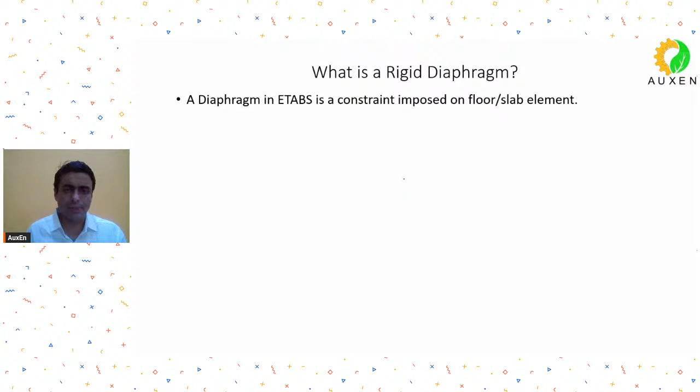We are all students of physics, so we understand what is meant by a constraint. What is the constraint in rigid diaphragm? It is that there cannot be any relative in-plane rotation and translation. The important word here is relative - the slab as a whole can rotate or translate, but point to point, relative points on the slab cannot have relative in-plane rotation or translation. If I want to apply such a constraint, that is called the rigid diaphragm.

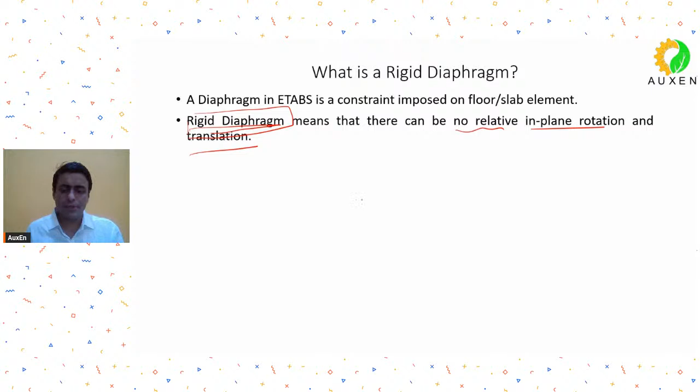Very simply put, it is just a constraint option available in ETABS. When we put this constraint, it means all the points on your floor or slab will displace as a rigid body - no relative rotation, no relative translation. Of course, they can rotate or translate as a unit in plane. Out of plane, there is no constraint - meaning the slab can bend, or points relative to each other can deform or translate out of plane.

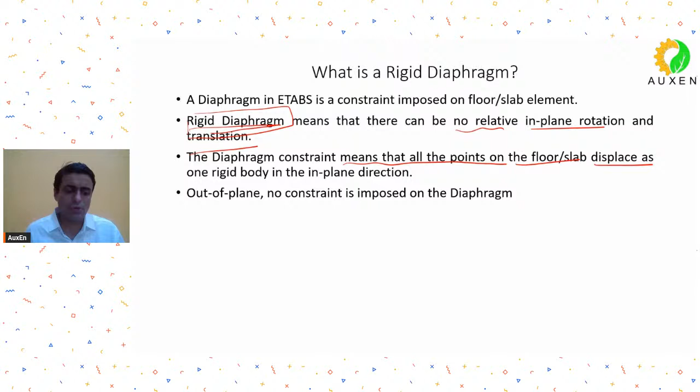So when I apply a rigid diaphragm constraint in ETABS, in-plane rotation or translation will be restricted. Point B can translate from B to B dash, point A can translate or rotate from A to A dash, but relative to each other, has AB and A dash B dash moved relative to each other? The answer is no, because originally their distance was x, and after translation the distance is still x. Globally they have moved, so translation and rotation are allowed, but relative rotations and translations are restricted. This is about the rigid diaphragm constraint.

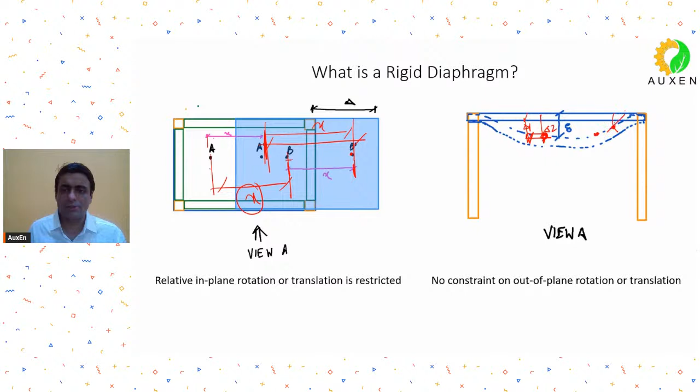What happens out of plane? Out of plane, there is no such constraint. Your points can have relative translations, as you can see over here. This point is translating more, this point is translating less. In out of plane, they can have rotations. So this point has rotated by this angle, another point has rotated by this angle. So relatively, they have rotated with respect to each other. So out of plane there is no constraint.

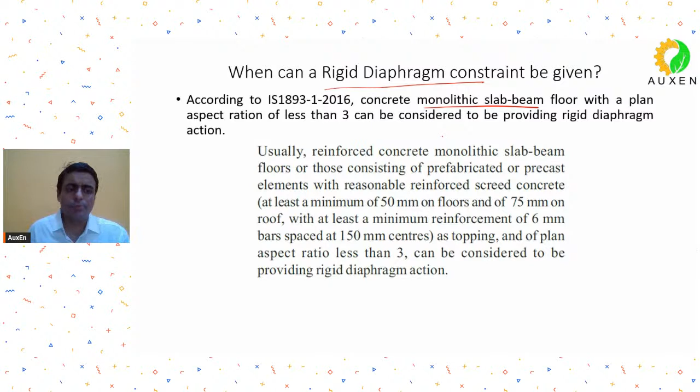Okay, this is what we mean by rigid diaphragm behavior. Now when do we assign, or for which floor elements or for which type of slabs can we give a rigid diaphragm constraint? Generally, you get a reference in IS 1893 part 1 2016, and it tells you that monolithic slab beam construction with a floor plan aspect ratio of less than 3 can be considered as a floor or slab which qualifies to be given a rigid diaphragm assignment.

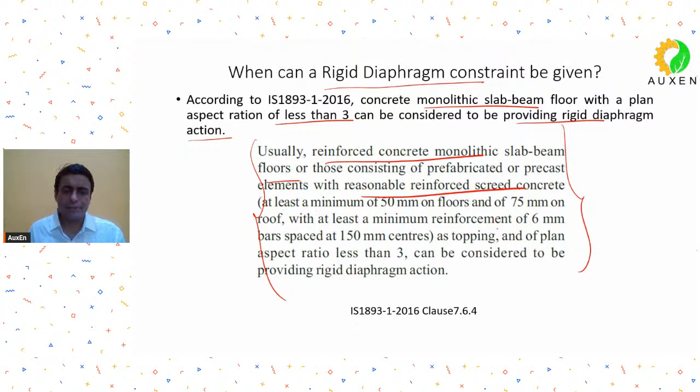Okay, and this is the codal provision that I have picked. This is 7.6.4. So if you see, reinforced concrete monolithic slab beam floors with reasonable reinforcement, at least a 6 mm bar at 150 mm center to center spacing, and plan to aspect ratio of less than 3 - if these things are met, then you can say that your slab can behave as a rigid diaphragm, and you can give a rigid diaphragm constraint to it. Okay, this is the meaning.

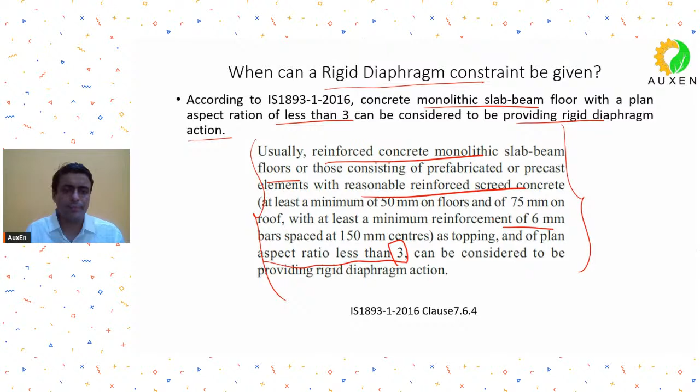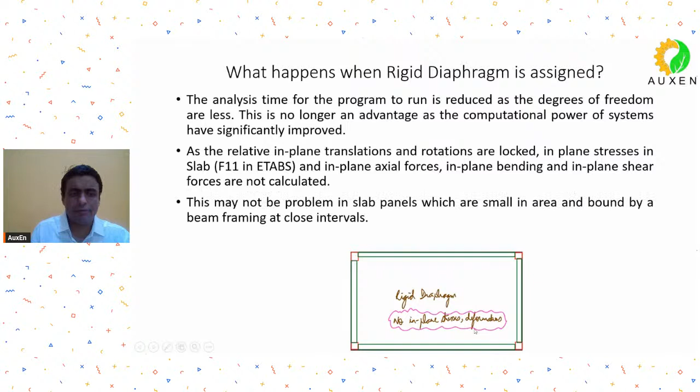We all know this. So what happens when rigid diaphragm is assigned? This is important to understand - when a rigid diaphragm action is assigned, the relative in plane translations and rotations are locked. Okay, so if the relative in plane translations and rotations are locked, now if I ask you, will there be any in plane stresses that will be generated in the analysis output? Tell me, will any in plane stresses or in plane shears or in plane axial forces be generated when I give a rigid diaphragm action? Yes or no? What do you think?

Hello. So the question is, if I apply lateral load, will this slab in the output give you any F11 stress, that is in plane stress, or will this slab in the output give any axial load output? Will it give any in-plane shear stresses? What do you think?

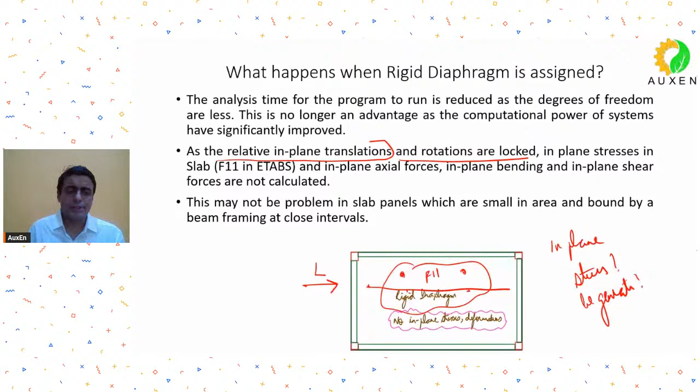So the thing to understand over here, and because of which we are conducting this topic, is that because the in-plane translations and rotations are locked, when you do your analysis, the in-plane F11 stresses or the in-plane bending moment or the in-plane shear is not calculated, and that will be given as 0 in the output. Very important to understand. So when you assign a rigid diaphragm action and do the analysis and look at the outputs, you will see all these results as 0. So they will not be considered or calculated in analysis, and therefore they will also not be taken in the design. So we are going to actually miss out on these outputs when we assign a rigid diaphragm.

Now this may not be a problem in slab panels which are small in area and bound by regularly closely spaced beam frames. When you have such a system - small slab panels bound by beams on all sides - the axial stresses in the slab, the in-plane shear stresses, in-plane bending moments are anywhere numerically not that high. So it's not a big problem in these types of systems. But the problem may arise in a different system where you are losing out on these analysis results. I'm going to show you in which systems this issue - that we are losing out on some analysis outputs - will be a problem to us.

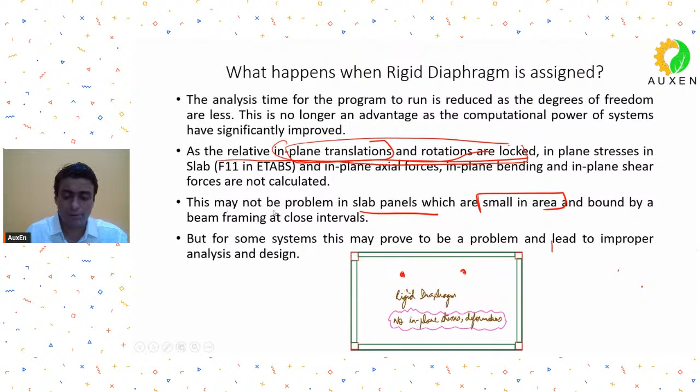Okay, so I'm going to show that to you. Systems like this - let's say closely spaced columns, closely spaced beams - here I don't have much problem even if I give a rigid diaphragm assignment, because the panel is so small that the in-plane axial stresses will be smaller in magnitude. So here I am not very worried. Where do I start to worry? I start to worry in systems like this. If you see this system, what is this type of system called as? Hello, anyone? What is this type of system called as?

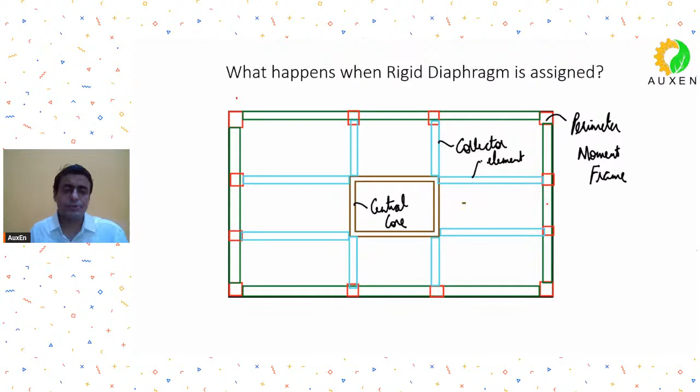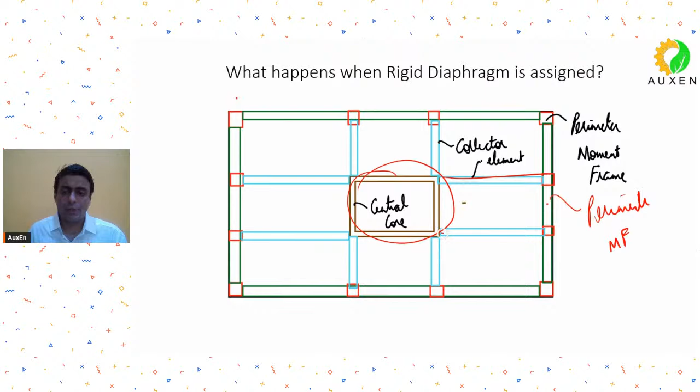So suppose in this type of system, if I assign a rigid diaphragm assignment, do you foresee any problem with that? Does anyone think it will be a problem if I assign a rigid diaphragm in this type of system? Tell me. No answer? I hope I am audible to everyone.

The problem will be that when there is a lateral load acting, between the system of the central core and the perimeter moment frame, the lateral load is usually transferred from one system to another through these collector elements. That's why they are called collector elements - they transfer the lateral loads between these two systems as axial forces.

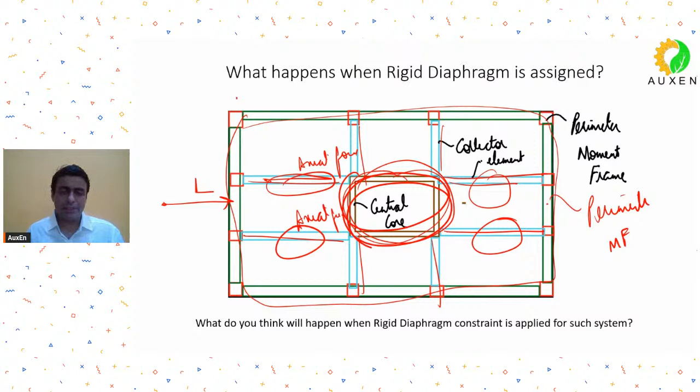So the problem is, if I have assigned a rigid diaphragm, will I get any axial force output in these collector elements? Tell me, will I get any output in these collector elements for axial forces? I will not get any axial force output.

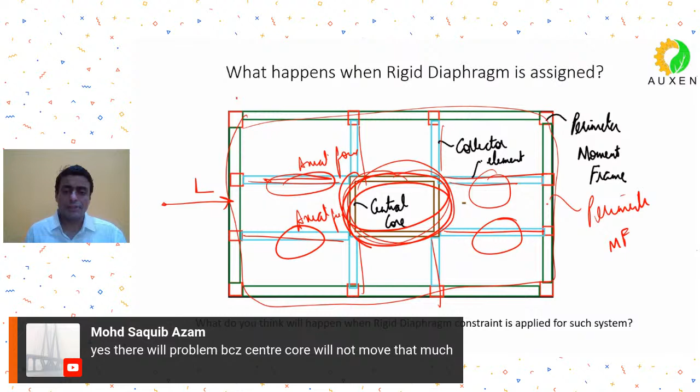One more point that Mr. Mohd Saquib Azam is saying, is that also because the deformations of these two systems will not be similar, it will again be a problem if I assign a rigid diaphragm to it. So in systems like this, assigning rigid diaphragms will be a problem because we are losing out on the analysis output, and thereby we will eventually lose out on the design results, because we are not designing our element for proper forces - the axial force will be displayed as zero.

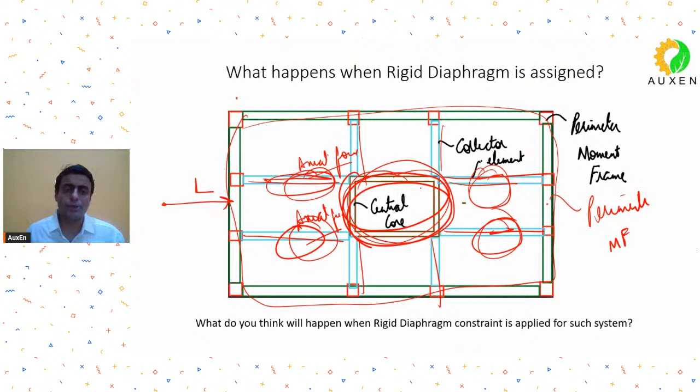I'll give you a demonstration just to show this point. So assigning rigid diaphragms in a system like this is a problem. So then what to do? In such cases, we should assign the semi-rigid diaphragm option that you have in ETABS.

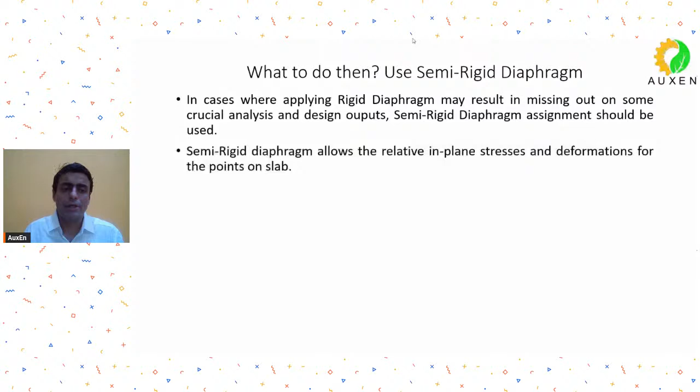A semi-rigid diaphragm is just a usual assignment where the in-plane rotation and translation is done as per the stiffness of your slab elements and other in-plane elements. That will give you a better and more accurate result. So in cases like these, it is better to assign the semi-rigid diaphragm, which allows the actual behavior to be captured, and therefore should be used in these cases.

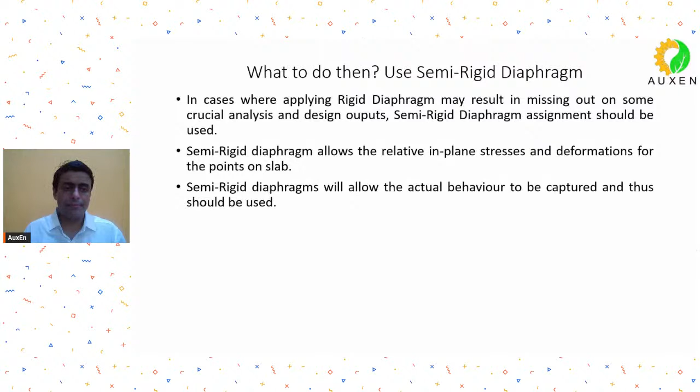Now let us understand all these things with the help of an ETABS model. I have prepared a small model, I'll just share with you. Before that, I have to stop my screen and open the ETABS window. Let's see if it works.

I don't know if you're able to see anything. What is visible right now? Nothing. I think the ETABS screen is visible now.

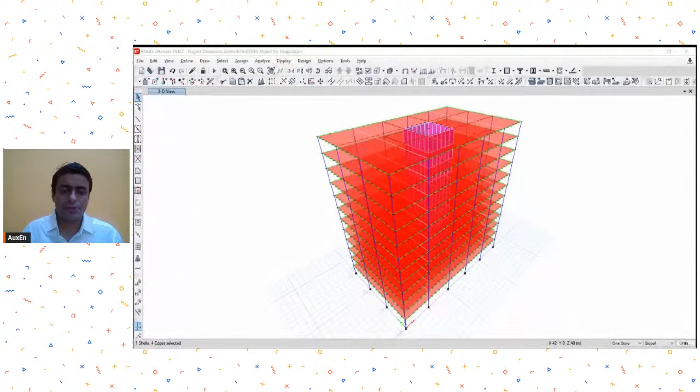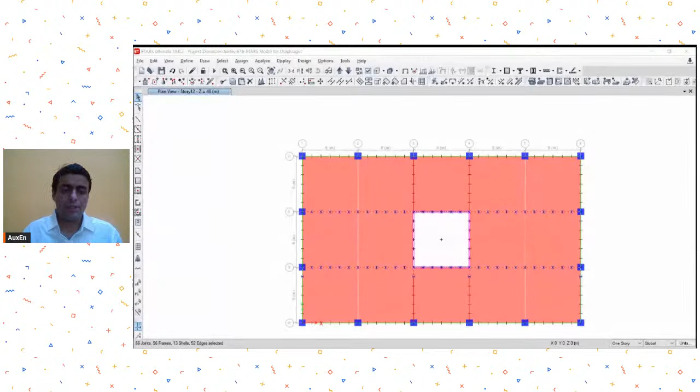I have prepared a small model like this. It's a small multi-story model. Just for presentation purposes, we have an outer periphery - these are all moment frames, and joining these moment frames are these collector elements that I have put over here. The red color elements I have put are the collector elements to join the central core with the outer peripheral moment frame system.

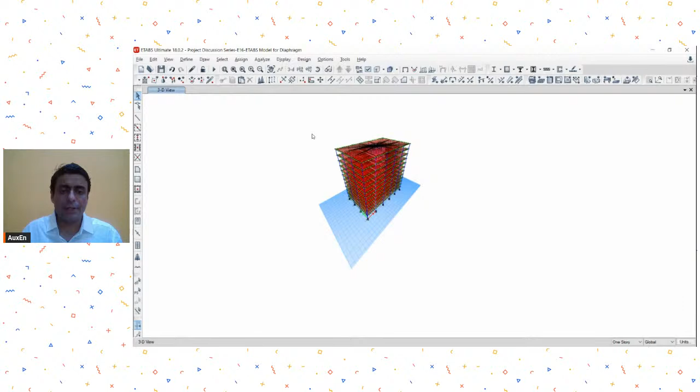Now what I will do is assign a diaphragm, and initially I will assign a rigid diaphragm to this. One more thing I will clarify here - you can simply select everything and assign a single diaphragm constraint to every floor level. I sometimes do it differently, assigning a different diaphragm name for every floor level, like D1, D2, D3, D4. But it's not required - you can assign a single diaphragm assignment to all floor levels, because a diaphragm is nothing but a constraint.

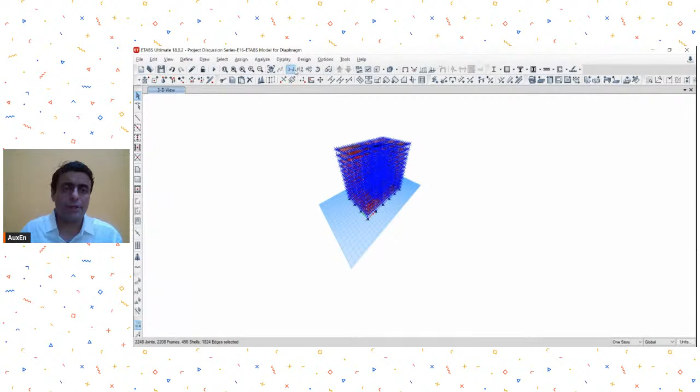So here, if you see, we have given a rigid diaphragm. Are you able to see this? We have given D1 as my rigid diaphragm assignment. So the rigid diaphragm assignment has been given as D1.

And now let me just run this analysis and we will see the output, what is happening. So the analysis is getting done.

First thing I would like to show you would be the F11 stresses in the slab. So let the output be shown on the screen, and then I will show you the F11 stresses.

So what do we expect after all this discussion? What do we expect the F11 stresses to be? Because I have given a rigid diaphragm assignment, the F11 stresses we expect would be 0. That is what we expect. Let's see if that happens or not.

I think it's taking a slightly longer time to analyze.

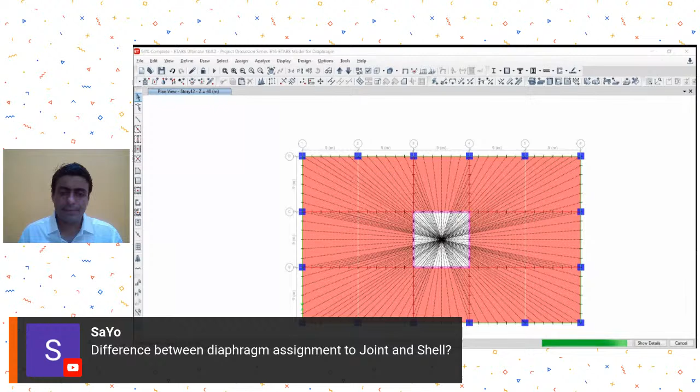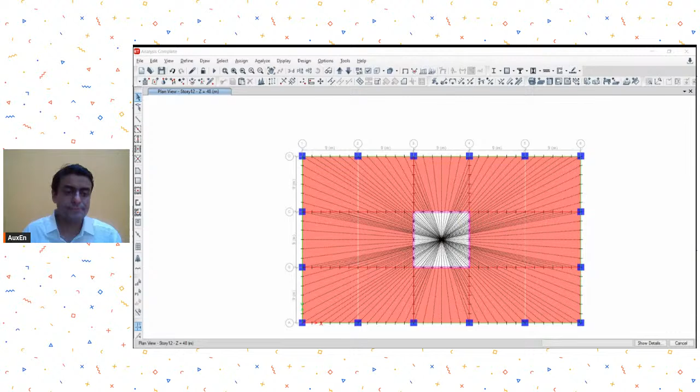So I don't know why this analysis is taking a long time, but I think it's happening now. It will be interesting to see the results that we are getting for it. I think I should have kept the model ready with analysis done.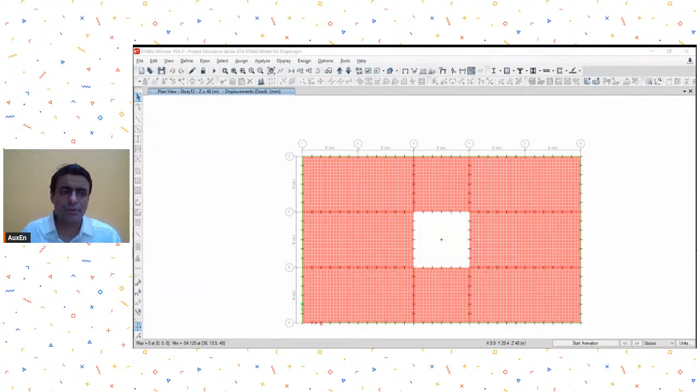Okay, so we have the output now. Let me show you the F11 stresses first for lateral loads because we are more interested in looking at it for the lateral loads. So here if you see, I don't know if you are able to see the output. Are you able to see this window?

So the F11 stresses in this entire model is 0. If I am moving my cursor over here, the F11 stresses in this entire model is 0. Why so? Because we have given a rigid diaphragm assignment, so it will not give any F11 output. That degree of freedom is locked. So the output we are getting is 0.

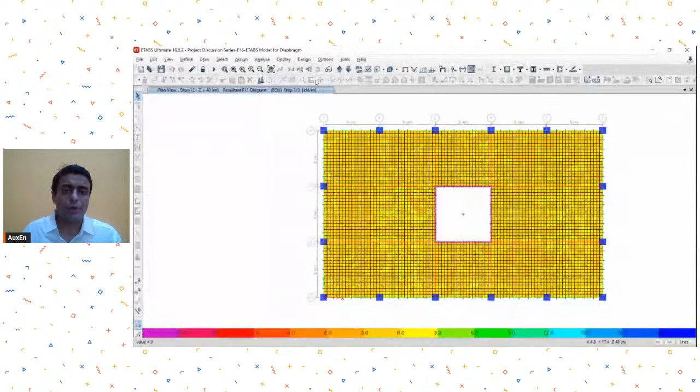F11 value 0. Now if I go to the beam framing member forces and show you the axial forces, again you will notice that the axial force is 0 in the collector elements.

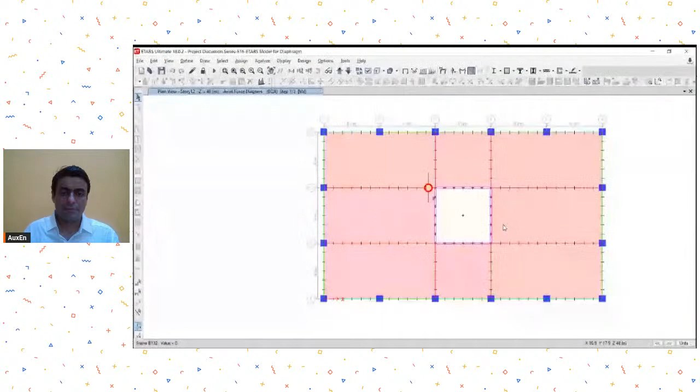Let me just do one thing. I think the outputs are not visible on the screen, are they? Let me share my screen. I think the window is not visible. The member force window, is it visible when watching it live?

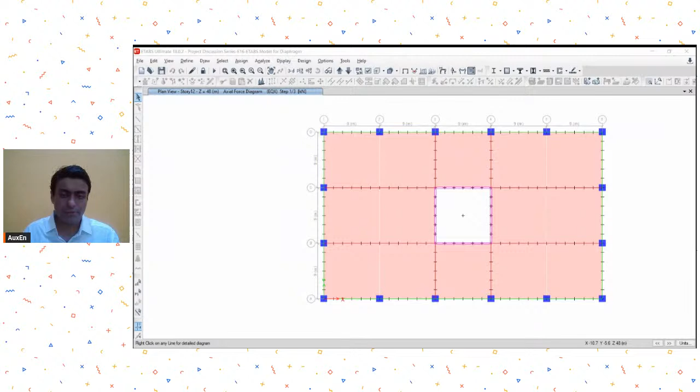I'm not sure. Okay, so the axial forces in this member is 0 right now. Wait a minute, what I will do is I think I'll share my entire screen. That way you will be able to see it. Yes, so here you will see the axial force to be 0 in the collector element.

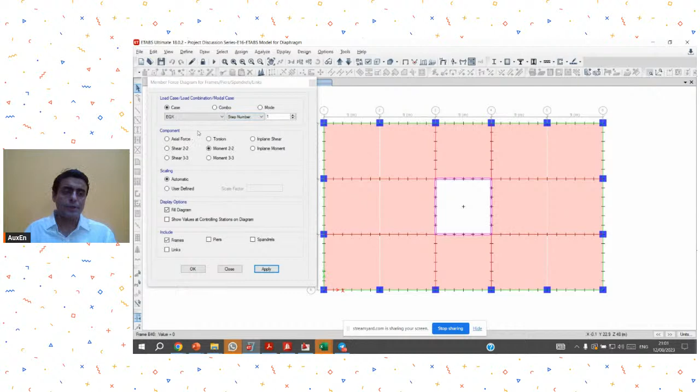No axial force. If I click on the M22, again you will see no M22 moment. All right, so everything is 0 over here. Why so? Because I have set a rigid diaphragm assignment.

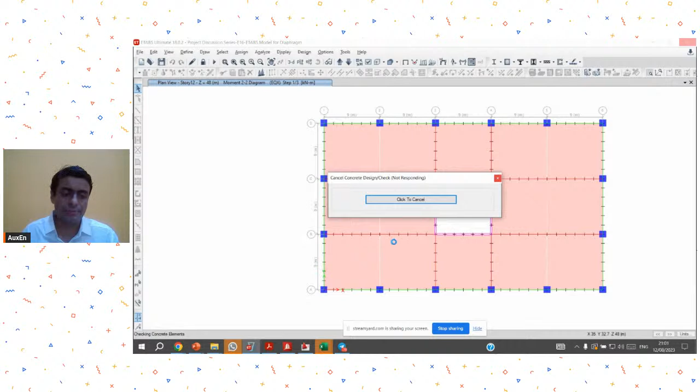Now the interesting part is that if I had to design this, so I click on design. Because there is no axial force in the collector element, the member will not be designed for any axial force. So in the design as well, we are going to miss out on the axial force in the collector element. Let's see.

So let me just right click on this, and for a lateral load combination, I'm just showing you the results. You will see that the design PU is 0. There is no axial force in this collector element because the rigid diaphragm assignment was given.

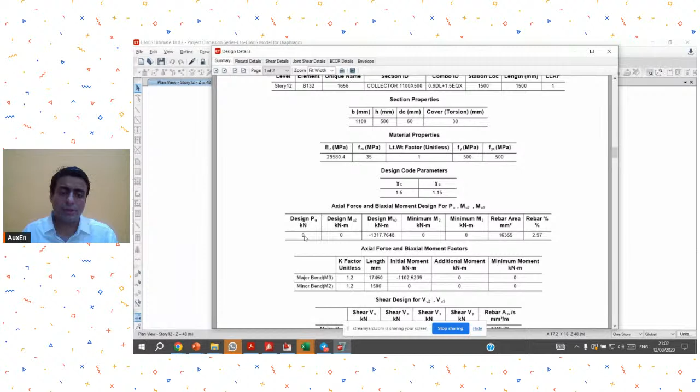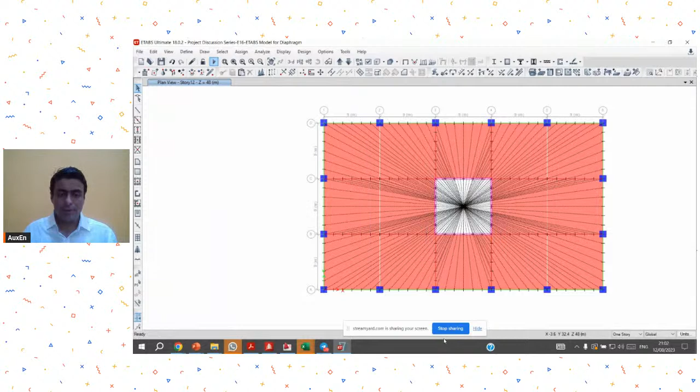Now what I will do is I will unlock the model and change the definition to semi-rigid diaphragm. When I change it to semi-rigid diaphragm, I expect that we will get the in-plane shear stresses F11, and I will also get the axial forces in the collector element. Those will be properly analyzed and accordingly taken in the design. That is what our expectation is. Let's see what happens.

Yeah, so the analysis is happening.

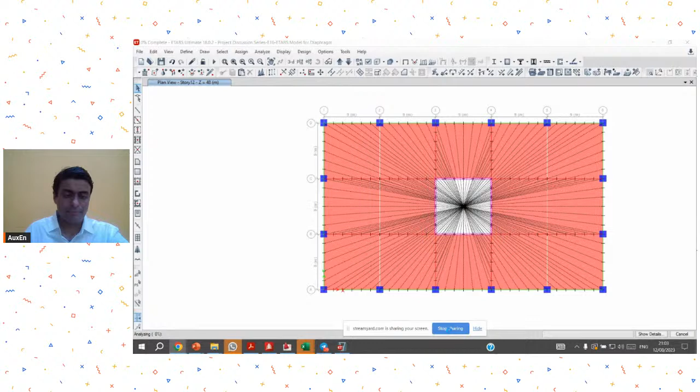Let it happen. Let the analysis happen, then we will see. Okay. I think running e-tabs in a live session may not be a very good idea because it is slowing things down a bit. Anyway,

So the analysis is happening and then I will show you the outputs. This time we will see some interesting outputs because after giving the rigid, semi-rigid diaphragm assignment, now we will start getting the F11 stresses and we will also start getting the in-plane axial forces in the collectors.

In the meantime, have you done this type of working before? Have you given semi-rigid diaphragm assignments and seen the F11 stresses or tried to see all these outputs? Hello? Yes, anyone who has tried to see these outputs before? Okay, so I think no one has tried to see this type of an output before. So maybe it's the first time for us that we are trying to look into this issue.

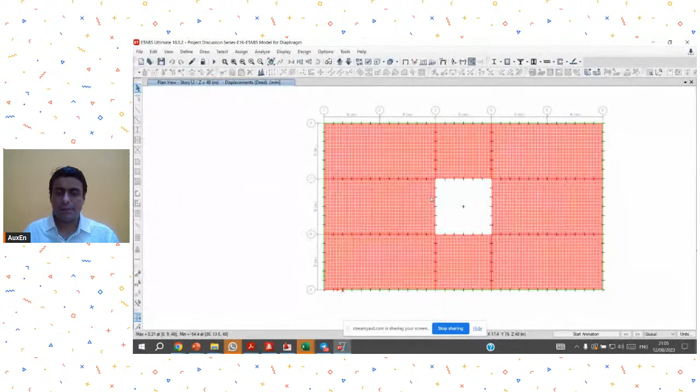Yeah, so analysis has happened. What I will do is I will once again share my screen, my entire screen I will share. I think the ETABS is visible. So now I will show you first the F11 stresses. And now interestingly, earlier what we were missing out in our F11 stresses, now we get those results.

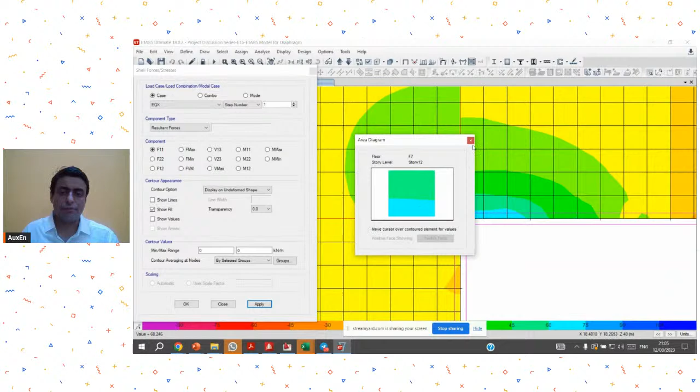I think you can see this cursor, it is almost 60 kilonewton meter per meter unit, 60 kilonewton per meter width. This is the F11 stress I'm getting over here. Similarly, I'm getting an F11 stress of almost close to 69, 70 per meter width over here. So all these F11 stresses otherwise I would have missed, especially at this junction points if I had given a rigid diaphragm, and now because I have given a semi-rigid diaphragm, I start getting these outputs.

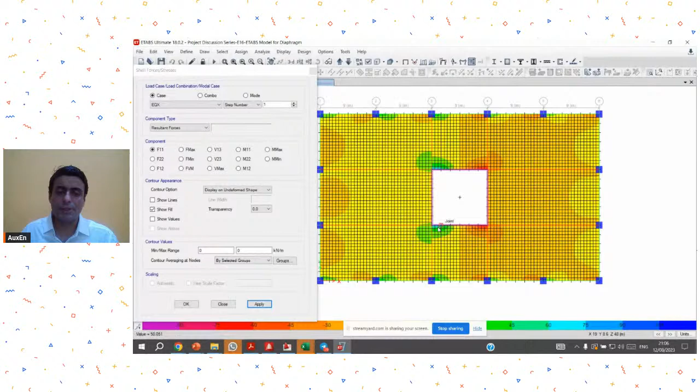Okay, more interestingly, if I go to see the axial forces in the collector elements due to lateral loads, this time you will see substantial axial forces being generated, yes or no? You will see substantial axial forces being generated in your member. This you were missing out earlier when you had given a rigid diaphragm assignment.

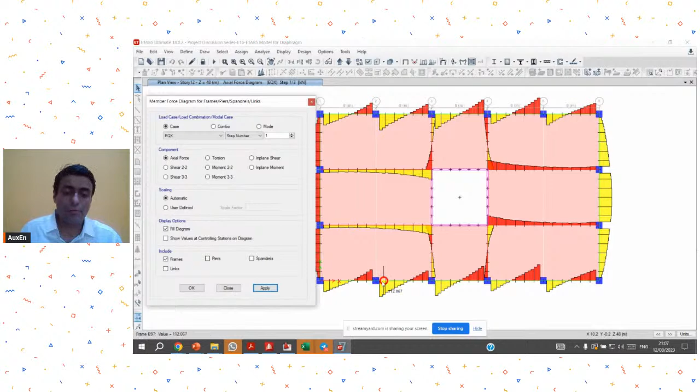Similarly, over here also you will see close to 80 kilonewtons of axial force which you would have missed earlier. Now, 80 kilonewton may be a substantial axial force in some cases. If your cross section is large, it may still not be very substantial. But if your building system, especially if you are doing a tall structure, it may be a substantial axial force to miss out on.

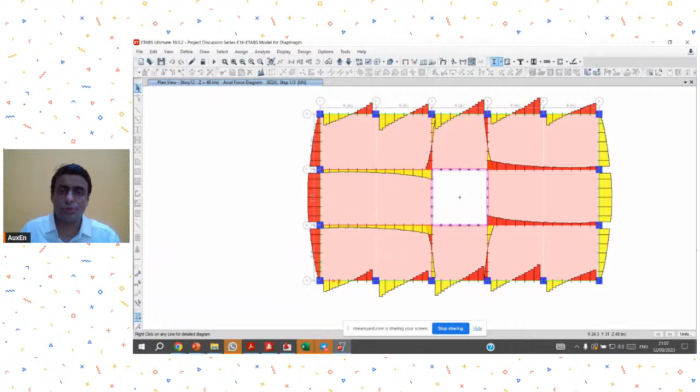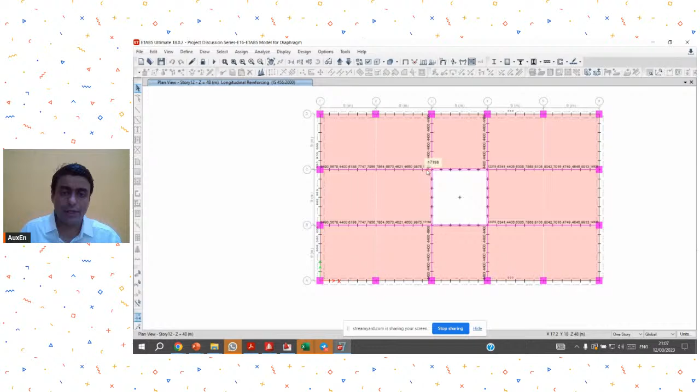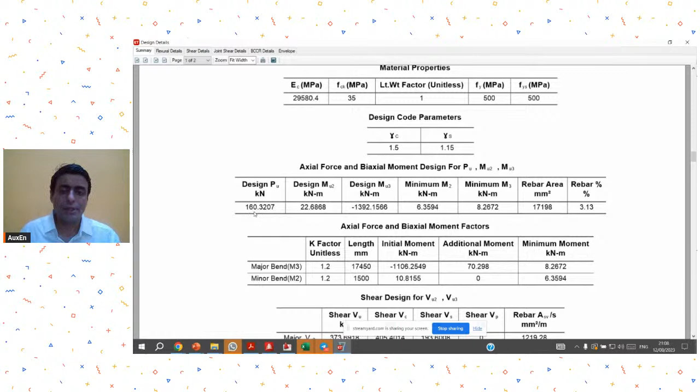Now, if I give a concrete design option to this, so you will now see that the axial force in the collector will now be considered in the design as well. So if I right click over here and if I show you this member, this time you will see that the PU is 160 kilonewton that we were missing out on earlier, and we also start getting some MU2. So this PU and MU2 we were missing in the design earlier, but now because we have given a semi-rigid assignment, it is being considered because ETABS is calculating these in-plane axial forces and moment.

So this is how the behavior is different when you give the rigid and when you give the semi-rigid assignment. Okay, so in cases where you have got large spans, in cases where you have such systems, when you have to design your collector elements, or where you have to check your slab for proper lateral load resistance, then you should give the semi-rigid assignment and then proceed. Okay, so I think this is what I had to tell you about this aspect about the semi-rigid and rigid diaphragms. I hope this is clear, our discussion.

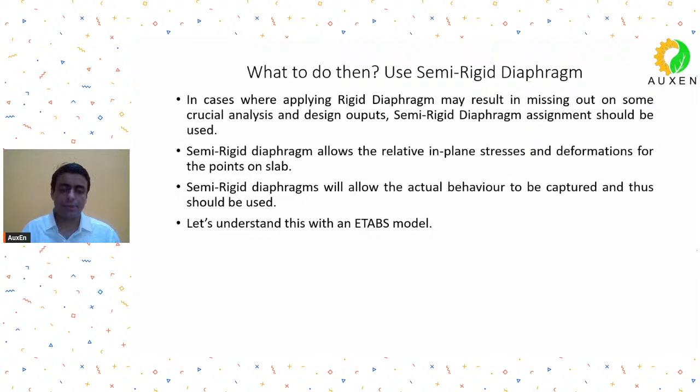Yeah, it went a little bit slow because of that issue with the live demonstration in ETABS, but I think you understood. So what you can do is you can try it out yourself also by giving this rigid diaphragm assignment and semi-rigid diaphragm assignment and then looking at the outputs. So this is what I had to tell you about this semi-rigid and rigid diaphragms. Now I go to the next point in discussion. If you have any questions, you may ask, or we can take your questions later on as well. Okay.

So now let me go to our next discussion point, and this is rather not a technical discussion per se, but nonetheless an important discussion. Okay. So as a civil engineer, we always want to build, we always want to create infrastructure. But the question over here that we would like to ask ourselves is that, are we destroying the nature? Are we destroying our ecosystem? And therefore, are we destroying ourselves by building too much infrastructure with very little planning? So that is what I would like to just discuss. This is a thought that I had over the past two three months. So I just thought I will put it over here on this platform for discussion.

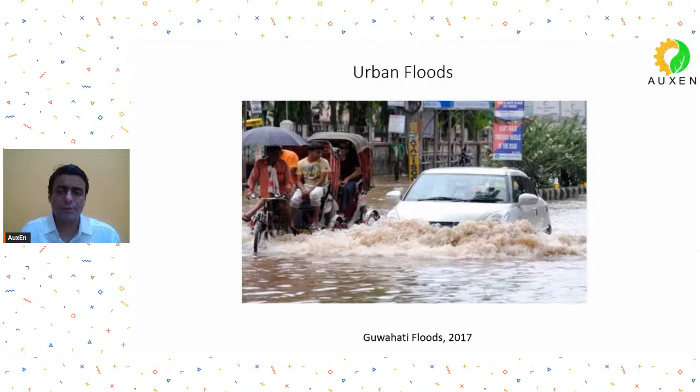But here we want to discuss why urban flooding, the phenomena of urban flooding, has increased. Urban flooding, when I say, I am mainly talking about cities getting flooded in a very short time - sudden flash flood like situations in cities, and not necessarily in a very high rainfall event. So what is the reason for this urban flooding phenomena seen in Indian cities?

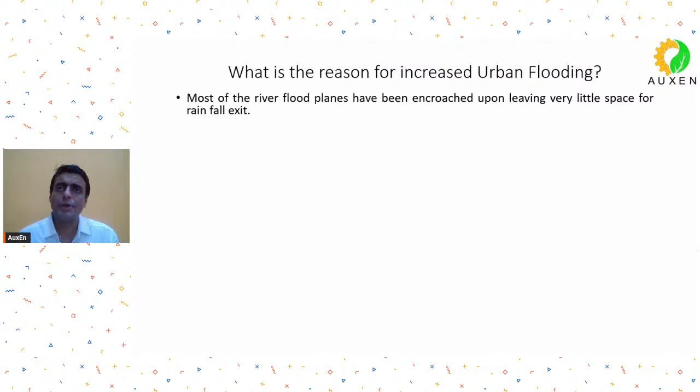As Megha is saying, rigid pavement, no water percolation. So I've tried to list down some points. These days, in all the cities, most of the river floodplains have been encroached upon. There is very little space for the rainfall water to exit from the urban space. Most of your river floodplains are encroached. Any big city you go, the natural drainage basin that you have will be encroached upon. If a city has a lot of water bodies like lakes, they will be choked up or filled up, and infrastructure projects will come up on them, leaving very little scope for water collection and drainage.

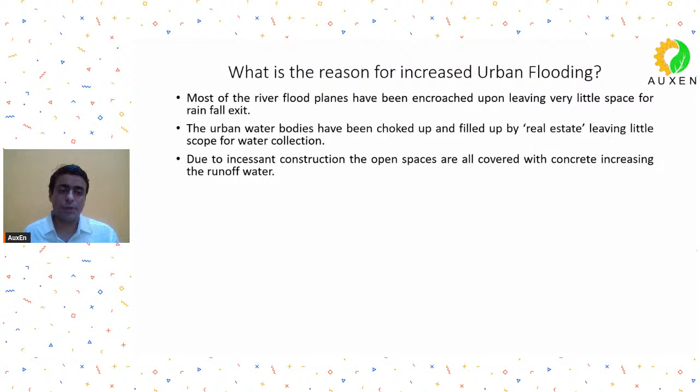Due to large scale incessant construction, the open spaces are all covered with concrete, what Megha was saying. Because of that, the runoff water increases - the ability of water to percolate is drastically curtailed because everything is getting covered with concrete. So that is another issue.

Another issue is that in most cities, the stormwater drainage was designed 20, 30 years ago for a lower stormwater volume. In new construction projects, you rarely get to see any provision for stormwater drainage. New roads coming up, new townships coming up - there is hardly any system made for proper stormwater drainage evacuation. So improper drainage planning, as Mr. Akbar Hamid is saying, is also an important and major cause.

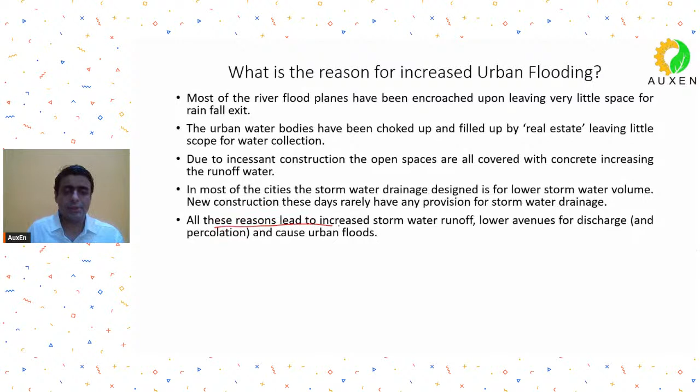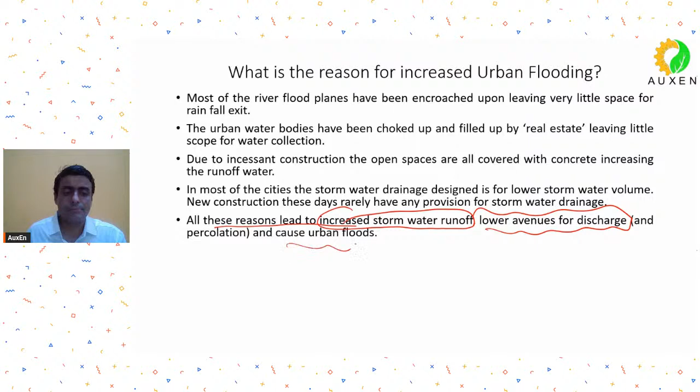So what does this all lead to? All these reasons lead to increased stormwater runoff. Your overall stormwater quantity increases because you have covered everything, so water is unable to percolate. You have got lower points for discharge because you have choked the urban water bodies, you have choked the urban rivers. So it is a recipe for disaster.

It is a sure shot reason for your urban floods in the cities, and it has become a major problem in several cities of India. We might be becoming smart under the smart city initiative, but due to lack of planning, administrative mismanagement, and no vision, we are creating city spaces that are almost unlivable. Every rainy season, you see your cities turning into a swimming pool like situation. So I think this is a major reason for the flooding situation that we are getting.

The infrastructure being created in these urban spaces is almost like mindless urban infrastructure that we are creating without planning, and it is leading to this issue.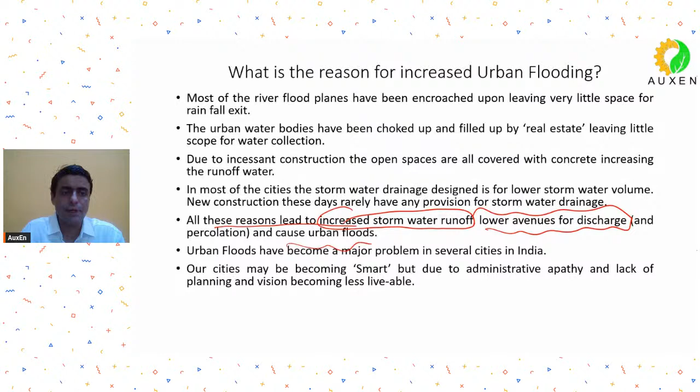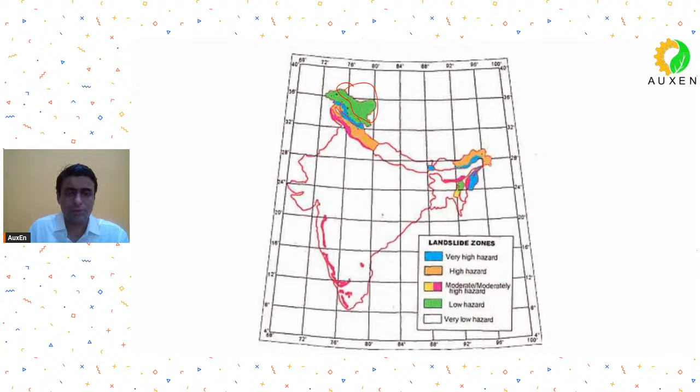Another hazard we have been facing in an increased manner over the past few years is the issue of landslides and slope subsidence or settlements, mainly in the hilly regions of India. This is a man-made hazard as much as it is a natural hazard. If you see the map of India, you will see the landslide prone regions: parts of Ladakh, Jammu and Kashmir, Uttarakhand, Himachal, Sikkim, Arunachal Pradesh, Nagaland, a few parts of Meghalaya, Tripura though not very problematic, and the Western Ghats.

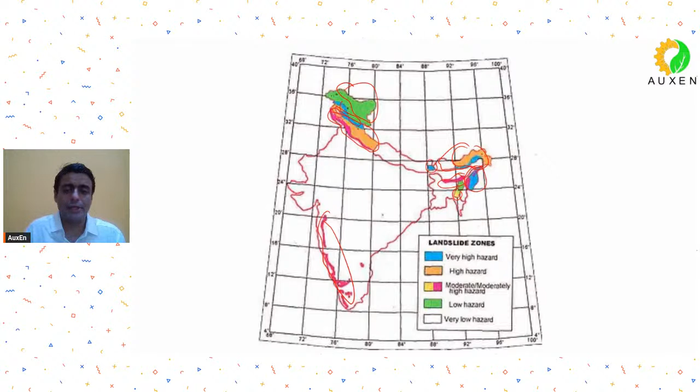All these regions have landslide and slope subsidence problems. In recent years, if you have been following the news, the events of landslides have been increasing. There are now problems with slope settlement, cities settling and sinking, and it has been significantly increasing on a year basis.

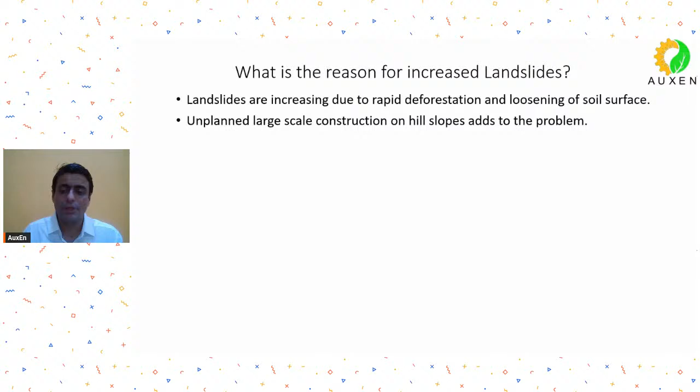So what is the reason for these increased landslides and related issues? A few reasons, and the civil engineering aspect is important here: there has been rapid deforestation and loosening of topsoil surface. We are doing unplanned large scale constructions on hill slopes, which adds to the problem. We are planning and constructing large scale infrastructural projects, large hydropower projects and large tunnels in these regions, which, in my opinion, disturb the critical ecological balance and lead to these issues like landslides and slope settlements and subsidence.

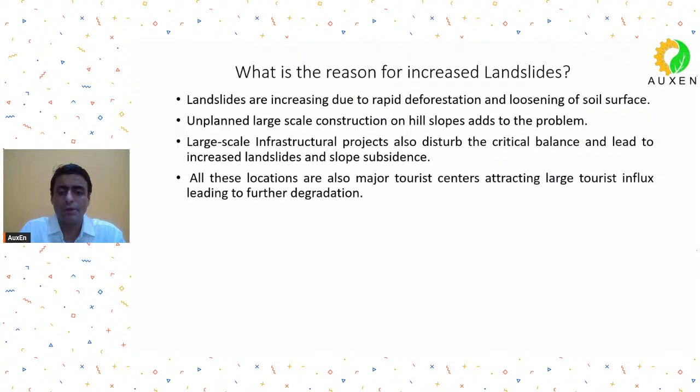All these areas shown in the map, which are prone to landslides and slope subsidence, are also unfortunately major tourist areas in India. People from India and abroad travel in large numbers to these places. So when there is a large tourist influx, there is an added problem of overall degradation of the environment and of the local ecosystem, which also adds to the issue of frequent landslides in these regions.

If you see any hill station in India these days, it is just packed with buildings. I have been to almost all these hill stations. All the slopes in the town will be full of unplanned houses built on the slopes. As civil engineers, we understand that construction on a slope is so tricky and dangerous, especially because the slopes in the Himalayan region are not stable slopes. Himalaya is a fold mountain, so Himalayan slopes are unstable slopes.

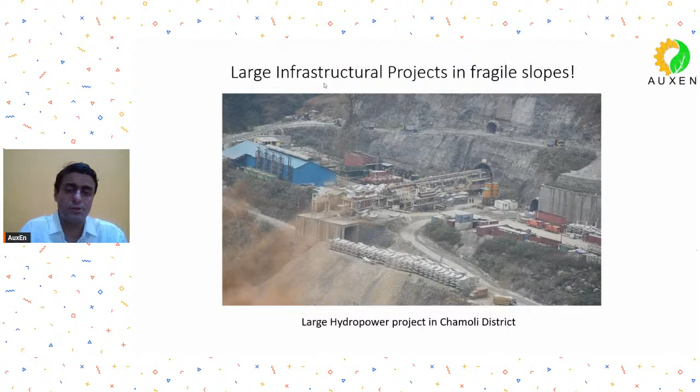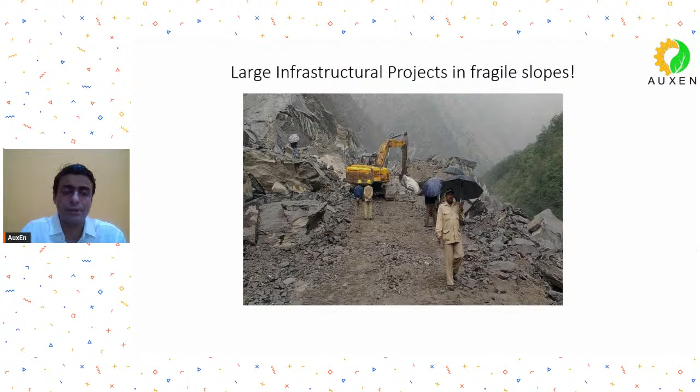This is a large scale project in Chamoli, Uttarakhand. There have been large scale road widening projects going on in Uttarakhand and Himachal Pradesh. These two states are especially, extremely prone to landslides in rainy seasons. So large scale projects like these on fragile slopes are leading to the overall degradation of these regions and to these natural hazards.

So we have to think that these regions are very important ecologically to the entire Indian subcontinent, because from all these northern regions, all the major river systems of India originate.

Whether it be the Brahmaputra river system, the Yamuna-Ganga river system, or the Indus river system, all these river systems originate from these regions, and they are sustaining almost a population of close to 2 billion people in the Indian subcontinent.

So we have to think, as civil engineers, what sort of development model should be adopted. The development model you adopt somewhere in Madhya Pradesh may not be the same development model you can adopt in a hill state like Himachal, Uttarakhand, or Jammu Kashmir.

We have to differentiate and understand that all regions have to be dealt with separately and independently of each other, and we have to keep the overall sync with nature and ecology in mind, because the earth has survived for so long.

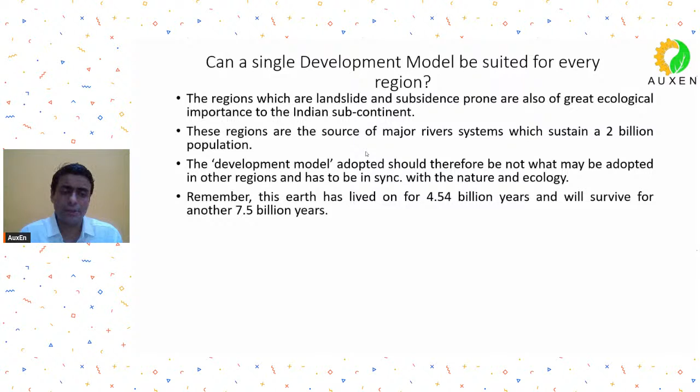For 4.54 billion years it has survived without us, so it will continue to survive without us in the future as well. If we continue to harm the environment, the environment is not at risk, it will mend itself, but we are at risk and we may face extinction if we continue to disturb the ecological balance.

So this is what I feel. As civil engineers, as planners, we have to understand these things as well, that in which regions what type of infrastructural development should be done.

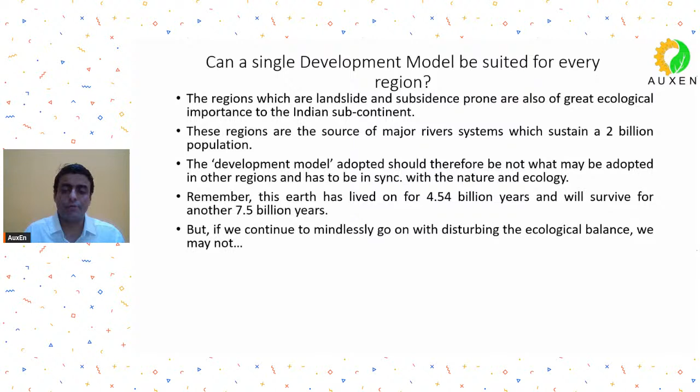So this is what I had to tell you, and I'll close this discussion with a few images of Joshimath that you might have read about almost 6 months ago. It was in the news because the town is now settling down.

For many years there have been warnings for Joshimath that it is settling, but the pace of settlement suddenly increased over the past year, and it has been settling at a very fast pace right now. Almost 9 centimeters of settlement was observed in Joshimath at many localities.

These are the images with which I would like to close my discussion. It's a thought for all of us. All of us are civil engineers. We have to think what sort of development we want, and understand that development should not come at the cost of disturbing the environment. Otherwise, we will face extinction in the future.

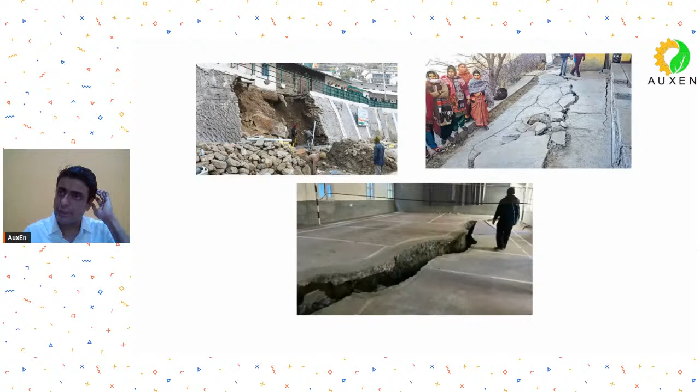Design house is asking what should we use in defining earthquake in ETABS: x direction, x plus eccentricity, or can we choose all three? You choose all three. ETABS applies all these three as a stepwise application, and in the load combinations also it will internally take all these three cases and consider them in the design as well.

Design house is asking, is it a good idea to use concealed beams? In our first episode, this is the 16th episode, we had discussed this issue in great detail. So I suggest you go to the YouTube playlist or our YouTube channel to the first episode of this series where we have discussed the issue of concealed beams in great detail.

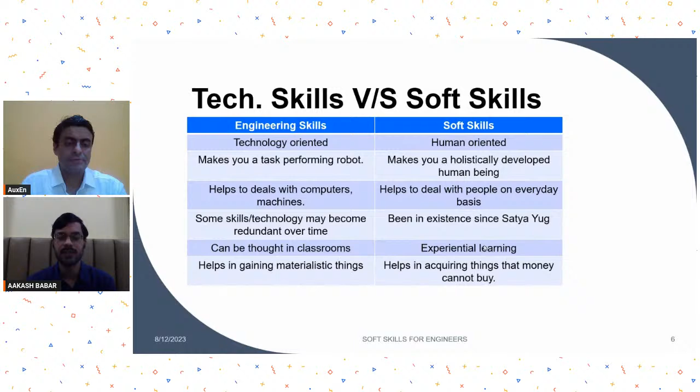Although we should not neglect engineering skills, they are also important, but now the time has come that we should also focus on soft skills. And there, as I mentioned, there are many skills. I request the participants to just try at one of the skills which they need.

Also, there are many principles and laws in soft skills. I'll shortly explain the Zeigarnik effect, which says that unfinished activity will always consume your time, meaning we'll always have in mind that one of our activities is unfinished. So this is the productivity tip: if you are going to start any activity, any work, make sure that you finish it within the time.

And this is in conjunction with Parkinson's law, that the available work will fill the time. Meaning, for example, in a structural engineering domain, if you want to design a G+4 building and you give 2 days for it, you can surely design it in 2 days. But if you don't have any other work and you just lazily delay it, you can complete the same work even in 7 days or a whole month. Whether that building could have been completed in 2 days, you have taken 31 days. So this is Parkinson's law: the work fills the available time.

And the Zeigarnik effect is for productivity. Once you start any activity, make sure that you finish it full and final, don't keep it pending. And another is Stephen Covey's model, which states a matrix for managing our work.